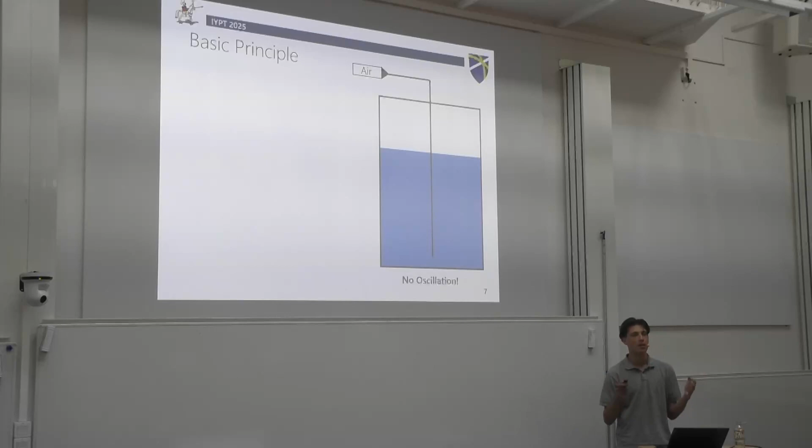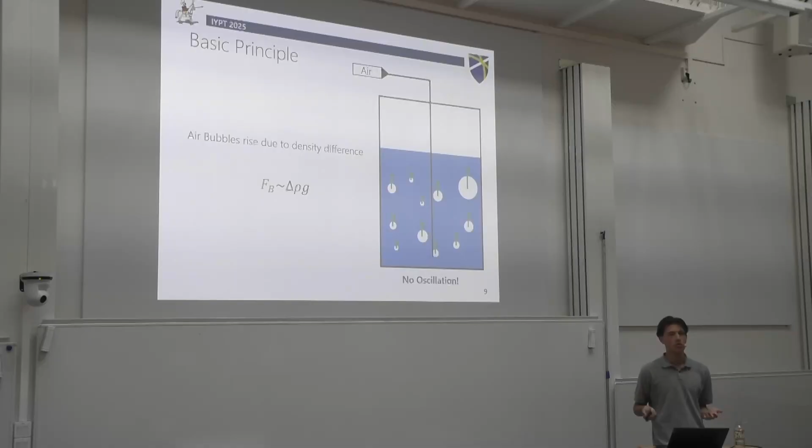So first of all, for the basic principle, the very counterintuitive thought: how could an air layer form in the first place? So we're going to take a look. If we have no oscillation and inject some air into the container, of course, all of the bubbles will rise due to the buoyancy force generated upwardly. So no air layer will form. But what happens if we now actually have an oscillation downwardly? Then we modulate the effective gravity. That means that we not only have the gravity but also the acceleration due to the shaker.

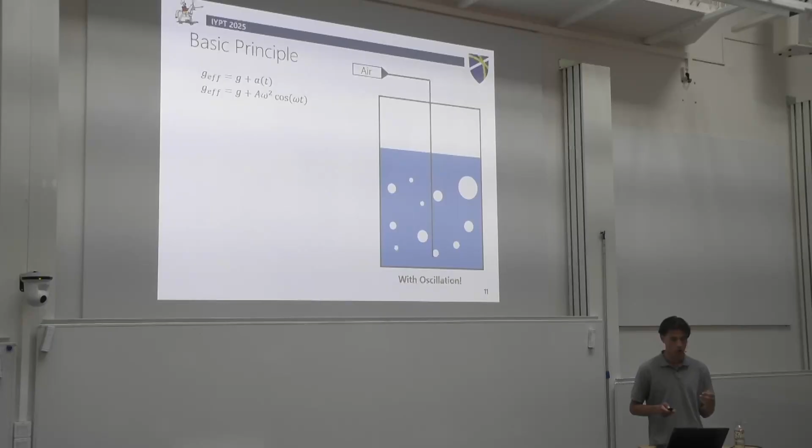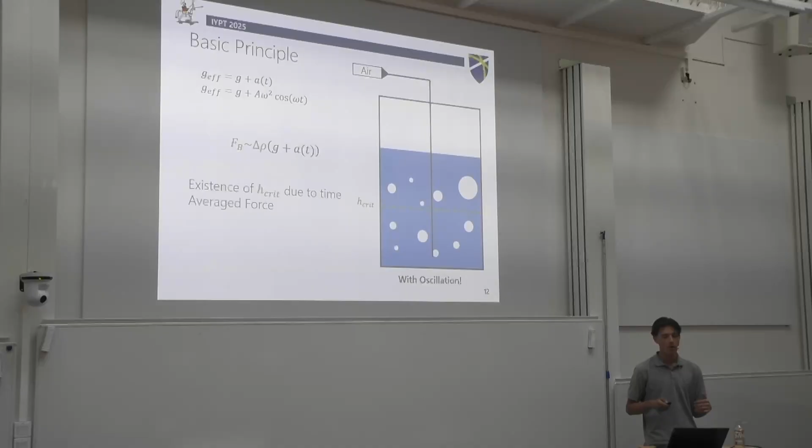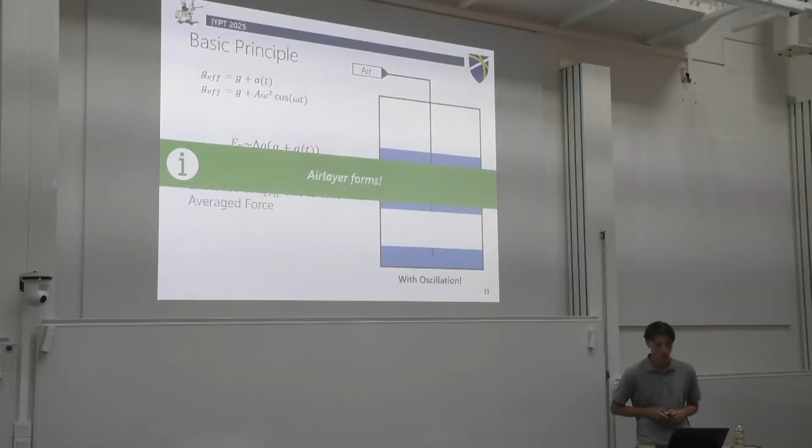So, and now due to that the buoyancy force is now proportional to that acceleration, we can time average that force and find out that there's actually a critical height below which all of these bubbles will sink, and beyond that critical height all of the bubbles will rise. Therefore, if we inject enough air volume and the oscillation is strong enough, some of the bubbles will rise and some of the bubbles will go down, and therefore an air layer is in the first place able to form.

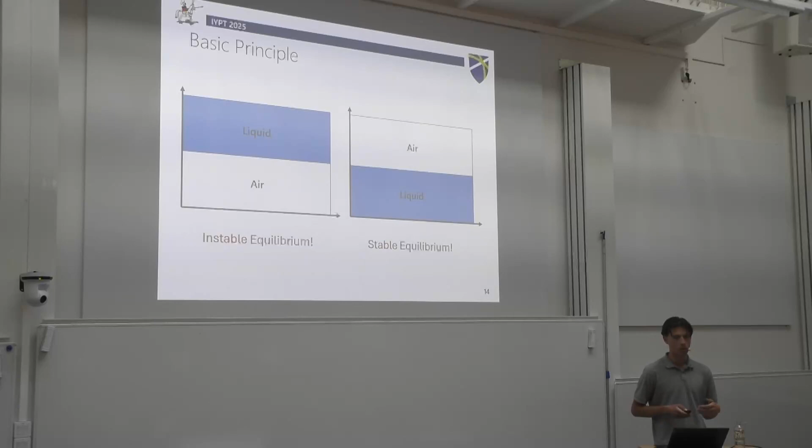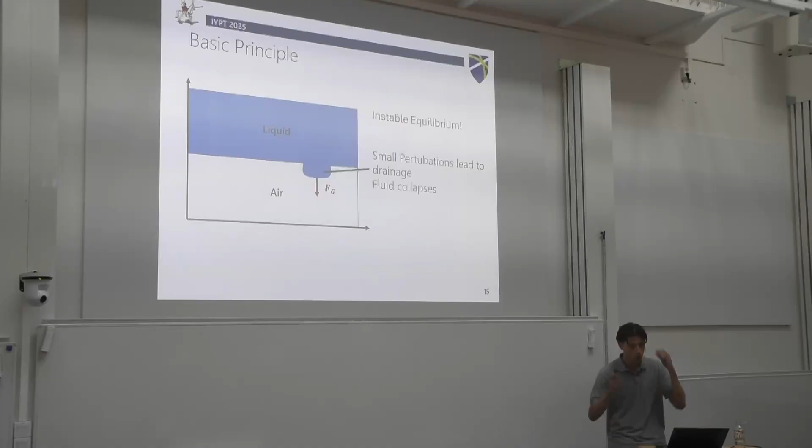So now that we know that, let's have a further look at these liquid-air and air-liquid compositions. Note that the composition we have here, liquid-air, is an unstable equilibrium. On the other hand, the air-liquid composition is a stable equilibrium. That means that if we look at the liquid-air interface, any small perturbation onto that surface would cause drainage and a full fluid collapse. So how is the liquid then able to oscillate in the first place?

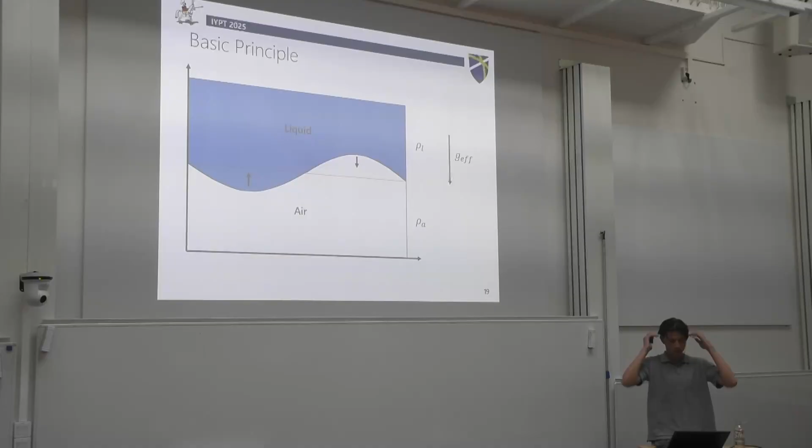Therefore, we're going to take a look at the so-called Rayleigh-Taylor instability, because we have a pressure difference on both of these sides, and now effectively modulating the surface. If the effective gravity is going upwards, the modes on the surface of the liquid are going to increase, and if the effective gravity goes down, these modes are going to decrease. Therefore, because the negative part of the effective gravity is higher, this liquid can be stabilized.

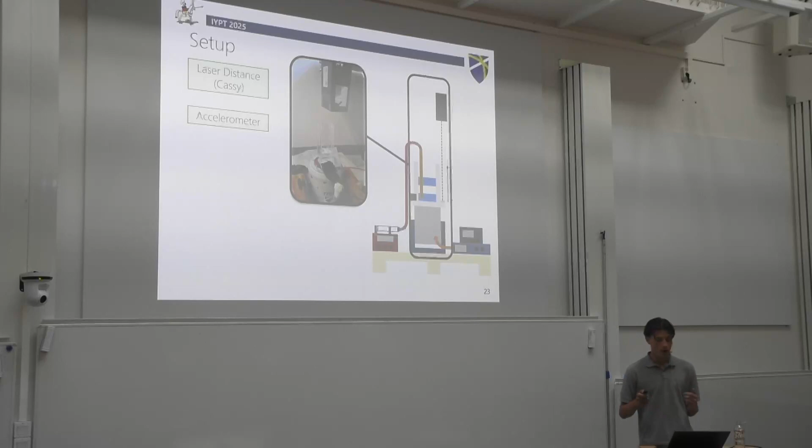So for an overall overview, we're going to start with the experimental setup, continuing with the first part, the stability analysis, and thirdly, looking at the stable oscillations, and concluding in the end. So for the setup, we used a laser distance meter as well as an accelerometer in order to measure the amplitude as well as frequency of our shaker system. The shaker was controlled by a function generator and an amplifier over a voltage output.

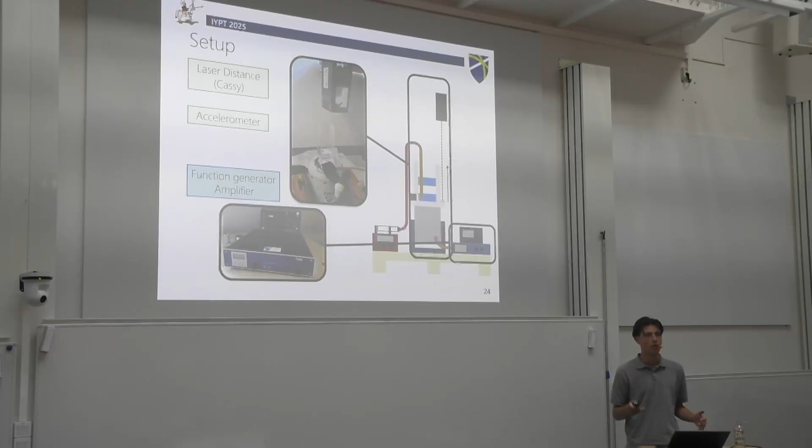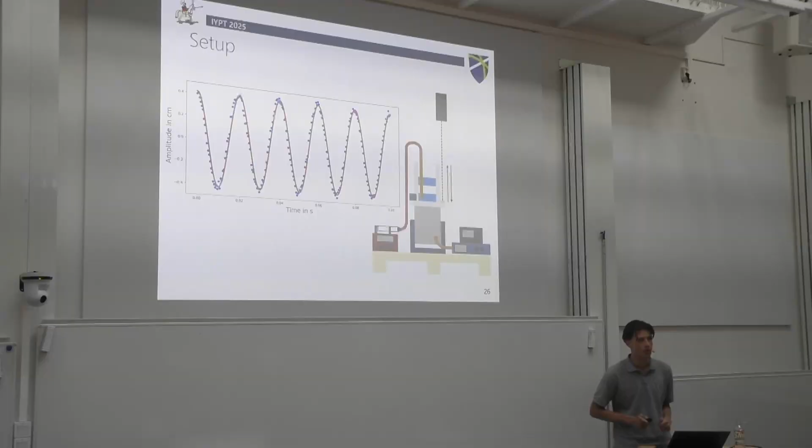In order to control and precisely inject air into our container, we used a syringe pump, which you can see right here. And we also double-checked that our setup actually produces sinusoidal oscillations, which are in the first order given here. So our setup produces that indeed. For the different materials we use, we have different silicone oils with different viscosities, and we have different container sizes and shapes.

For our data analysis, we're using Python in order to find our critical amplitude based on the data from our accelerometer. And for the stable oscillations, we're using Tracker in order to track the fluid surface. So let's have a look at the stability analysis, and therefore we're going to plot some preliminary analysis. We're going to plot the amplitude over the frequency and see where the liquid falls down, and if there may be several boundaries. So if we look at it here, we can see that we have one lower boundary and one upper boundary.

But what does it look like? Therefore, we brought a video of an increasing amplitude. You can see here that the surface gets very unstable, and at some point the whole fluid will collapse downwards. And then if we decrease the amplitude, at some point the oscillations can't stabilize the surface anymore, and all of the fluid will drain, as I've already explained, like in an unstable equilibrium.

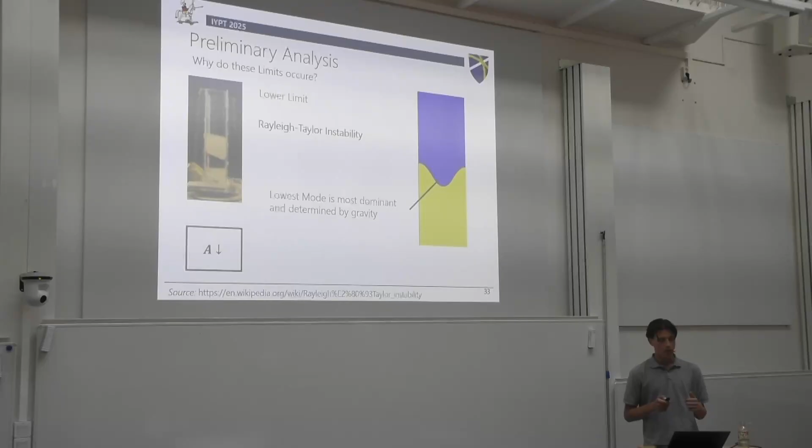What is this due to? The lower limit is due to the Rayleigh-Taylor instability, where the lowest mode is the most dominant one and it is affected by gravity. And therefore you can see this fluid collapsing. And for the upper limit, we have the Faraday wave instability, where the inertia of these Faraday waves overcomes the capillary effects of the waves themselves. So we took a video from the top and could see that we have some kind of Faraday wave pattern inside of our container. So therefore we now want to further investigate these wave patterns.

Therefore we're going to take a look at the standardized Faraday instability. Assuming that we have a vorticity-free flow, we can represent the surface as a superposition of harmonic eigenmodes, where we have on the one hand the spatial structure determined by the harmonic eigenmodes and one time-dependent evolution term determining the amplitude. So first of all, we take a look at the harmonic eigenmodes, which need to satisfy the Helmholtz equation, and by constraining a Neumann and the no-slip condition, as well as a free surface, we can solve for the following eigenmodes, which are a product of cosine and sine functions, where you can see a representative mode for the 5-3 mode combination. So now that we've clarified the spatial structure, let's move on to the time dependency.

Therefore, we're going to start with the standardized Navier-Stokes equation, and assuming that we have kinematic boundary conditions as well as the dynamic boundary condition of the pressure being tangential to a free surface, we can then assume that we have a rotation-free, stationary, and incompressible flow, and solving for the potential of our fluid, which is interestingly growing with some kind of tangent hyperbolicus.

And then solving out of this, we can separate the variables and solve for the actual differential equation describing the time dependency, which you can see right here, as well as the dispersion relation connecting the eigenfrequency of the surface with the wave number. So let's have a look at this. We can see here that we plot the dispersion relation of the wave number. For smaller wave numbers, gravity determines this term, and for higher wave numbers, the surface tension determines the surface dynamics.

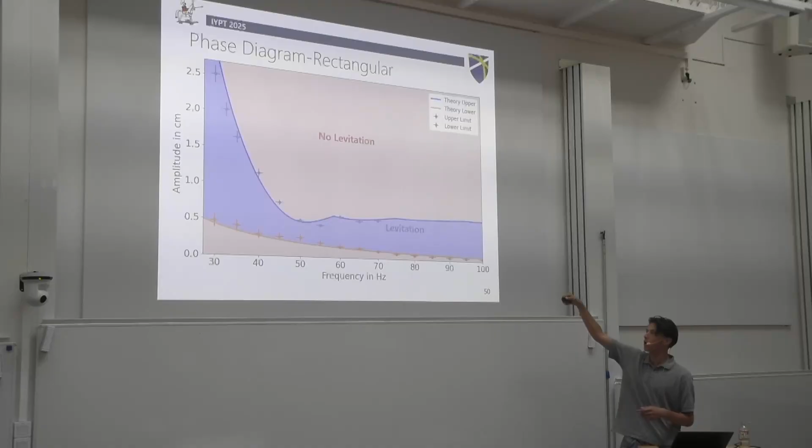So therefore we found in literature this equation for this instability criterion, and plugging all of this in, we get the following equation for the critical amplitude, and plotting the fundamental mode as well as the respective mode for every single resonance tongue. We can then look at our experimental results and see that we have a very good quantitative agreement with our theory, where we can see a clearly distinctive resonance tongue, typical for the Faraday instability, on our upper limit. And so that means that below and over those curves, there's no levitation possible, where in between the levitation is indeed possible.

So the same we did for a circular container, where we need to apply different boundary conditions. As you can see here, we are also able to quantitatively predict the upper boundary as well as qualitatively the lower boundary. We also investigated the lower limit for the different viscosities, where we plot for different frequencies, and can see here that for most of our experimental results we are also in quantitative agreement, because higher viscosity increases the stability of the surface, therefore higher inertia effects are required in order to break off that surface.

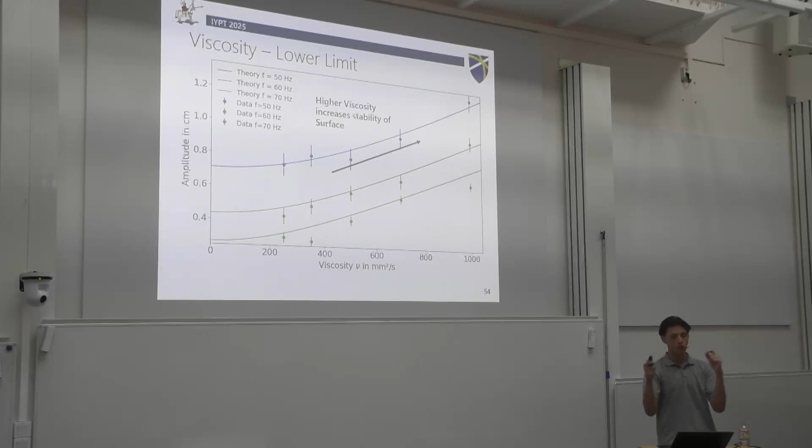So now we fully investigated when the fluid layer is able to oscillate. Let's have a look at how it actually oscillates. Therefore we're going to take several little steps. So one can look at the container and the pressure and volume, assuming the ideal gas law only for this air cushion. We can then write out the complete pressure force, accounting for the atmospheric pressure as well as the gravitational force.

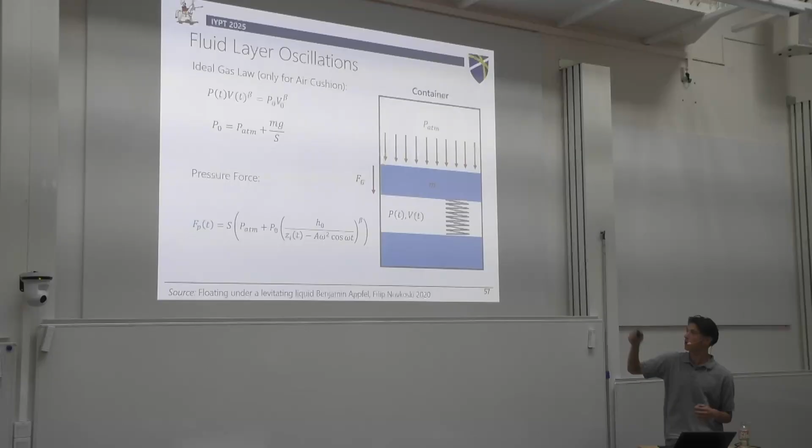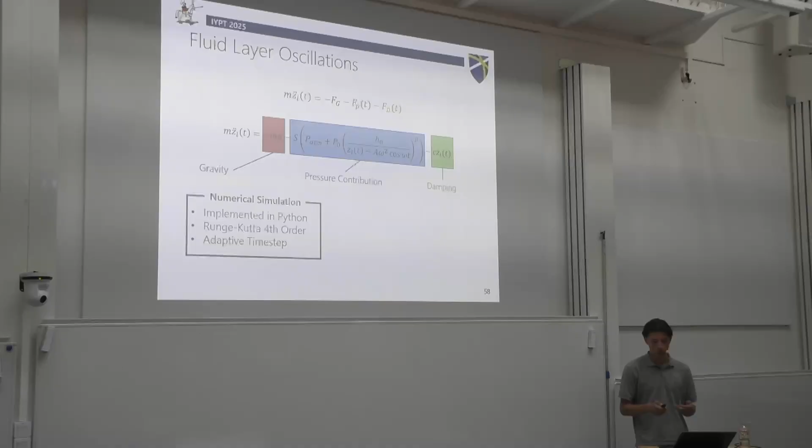And then we get the following equation for the pressure force, which reminds us that this air layer actually acts as some kind of non-linear spring. That means we get the following differential equation, accounting for gravitational pressure as well as damping effects. So, because there's a non-linear spring, and we also have an external vibration to the system, we could possibly think about a resonance oscillator. So we can very shortly plot the resonance behavior of such a phenomenon, only theoretically, where you can see that this behaves in an approximately Lorentzian way with one resonance frequency.

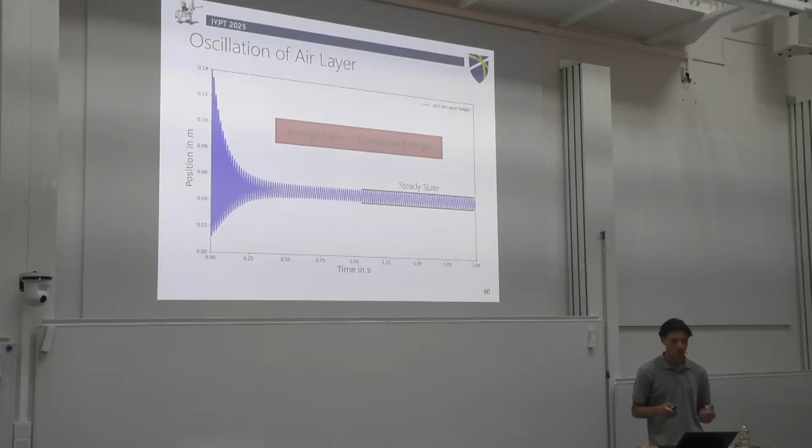But nevertheless, we want to investigate the actual motion of the air layer height. Therefore, we are plotting a simulated curve where you can see in the beginning a stabilization due to the nonlinear pressure effect, and in the end, a steady state oscillation. The steady state is reached when the energy input from the shaker approximately matches the dissipated energy. So we can zoom in onto the steady state oscillations and plot our experimental data we've achieved from video tracking, and can see that we're actually able to precisely predict this by fitting the damping coefficient.

Note that here, interestingly, at some point, the oscillation of the air layer itself comes up with the exact same frequency as the shaker, only with some small inaccuracy due to the nonlinearities in our differential equation. So let's have a look also at these non-steady state oscillations in the beginning, where the whole fluid itself gets stabilized on its own.

We can see here many things could remind us of a kind of Kapitsa effect, plotting FFT of that. We can also indeed see that we have one very fast vibration with a lower amplitude, and then going on to zero with a high amplitude and very low vibration, having the same effect of a Kapitsa pendulum where the unstable equilibrium is stabilized as well.

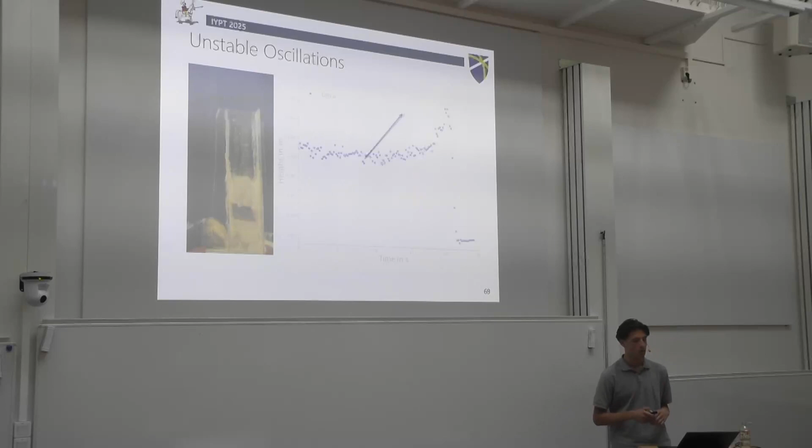And now think about what is happening here, because at some point the fluid gets unstable in some kind of way. That means the mass of the fluid layer gets reduced, and a little bit of the fluid is falling down. So therefore, due to conservation of momentum, we just generate an upwards force driving the fluid to an increasing height. And when the complete mass has fallen down, then of course the whole fluid collapses itself.

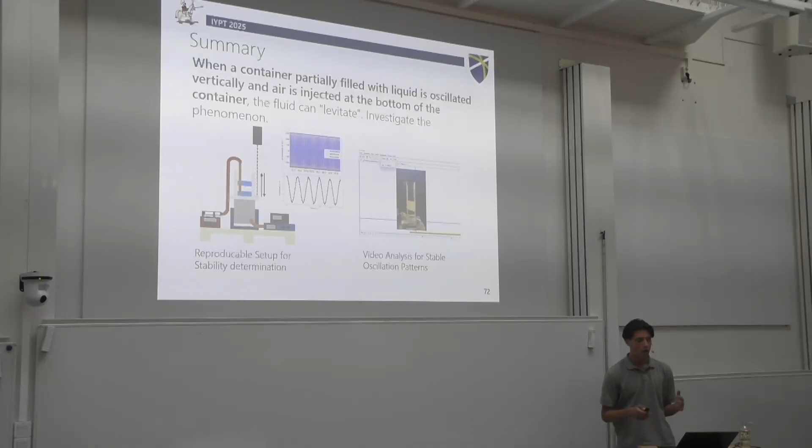So let's briefly summarize what we did today. We've built a reproducible setup for the stability determination and used Tracker for the video analysis of the stable oscillation patterns. On our theoretical side, we used harmonic eigenmodes and the Mathieu equation in order to model the surface dynamics, and we used a nonlinear pressure model for the stable oscillations of our liquid. So we are able to predict the stable levitation for different frequencies, viscosities, as well as an investigation of stable and unstable oscillation patterns.

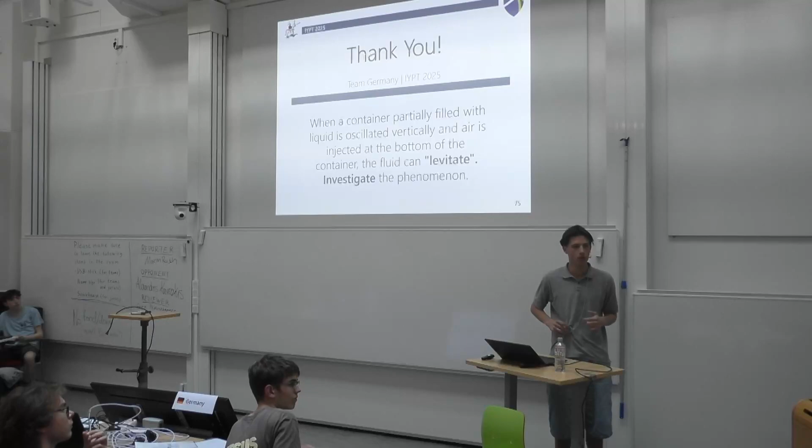So first of all, I want to ask you whether you encountered any bubbles during the experiment. We do not account directly for bubbles. We believe the... Okay, yes or no? Did you encounter any bubbles? No, we do not account for bubbles. Okay. Also, I think you mentioned that you use a syringe. So how did you actually inject the air? So we use a syringe pump and then place the needle of our syringe by hand in the container. Okay, thank you.

Also, in slide 47, I think you mentioned something about the ODE part. Did you do both? Did you do an analytical integration? Why did you choose only one? What you see here, where the Mathieu ODE gets unstable, is an analytical approximation for the first order resonance tongue. Oh, and the rest was numerical? No, so this model is made analytically, and the oscillation patterns are numerical.

Okay, thank you. Also, because I didn't quite understand, you encountered multiple waves in between the layers, right? Mm-hmm. Okay. Also, in your experimentation, did you vary both the amplitude and the frequency? No, so we fix the frequency and then pull down the amplitude and see at which point the fluid collapses. Okay. Not simultaneously. Generally, if you varied both parameters. So we varied the amplitude.

Okay. Also, can you tell me exactly what is the reason for the upper and the lower boundary that you mentioned? So the upper boundary is due to the Faraday waves' inertia overcoming the capillary effect, because the Faraday waves themselves are stabilizing the liquid, but when the inertia gets higher than the surface tension, the whole liquid column will fall down. And the lower boundary is due to the Rayleigh-Taylor instability, that at some point the most dominant wave mode, which is determined by gravity, doesn't get stabilized anymore and falls down. Okay, thank you very much.

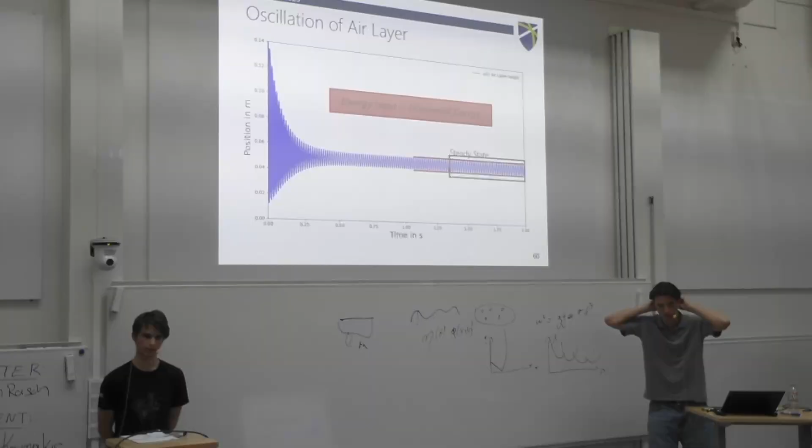The dimensions of our container were mostly 5 centimeters quadratic. Say that again, sorry? 5 centimeters, as a square? Yes, as a square. So you mentioned sidewall friction. Did you account for friction in the model? Yes, so we have a dissipation term.

And for this liquid layer oscillation, we're just assuming a velocity proportional damping. How did you determine this? So we fitted that to our experimental data. Okay, thank you. Did you investigate the resonant frequencies of the fluid? And if we oscillate at that resonant frequency, does that relate to the amplitude of oscillation of the fluid?

No, we have only theoretically investigated the resonance behavior, but that would be definitely possible. Opponent, do you think that the resonant frequency of the fluid is significant, and that if we oscillate at this resonant frequency, it will increase the amplitude? I think I agree with that. Yeah, but I think it should have been investigated by the reporter himself.

How did you define the position of the fluid? Was it the center of the fluid? When you did your experiments, did you measure it from the center? Yes. And in your model, was this accounted for, that it was from the center of the fluid? Yes, so we modeled it in a standardized Faraday waves model.

Opponent, how significant do you think the bubbles are to the motion of the fluid? Like when it's climbing upwards, you mean? Yeah, in terms of the overall oscillations of it, how significant? Oh, it's the overall, but it actually would change basically the width of the layer itself, and then it would create some discrepancies. I think it's a possible error, because it's a thing that we can avoid actually, when the bubbles are climbing when you inject it downwards.

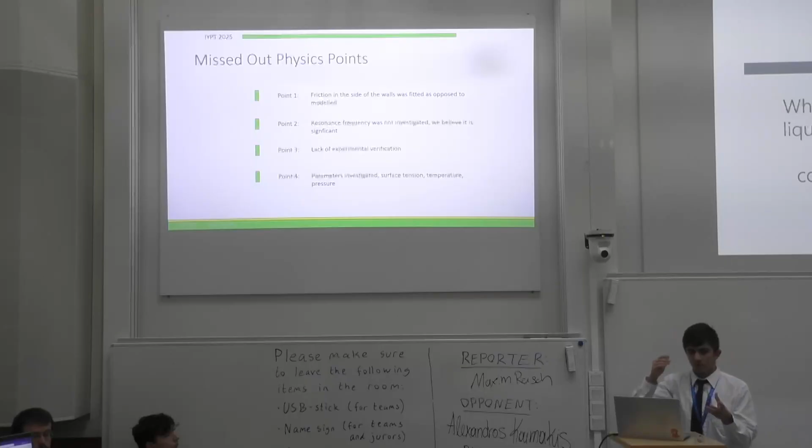There was discussion on the clarification of the climbing of the fluid, and we believe that the reporter's explanation of how the fluid climbed up was well done, but we do think that there's a missed point here with the resonant frequency, because we believe that oscillating the fluid at that frequency will be part of what increases its amplitude. And also, friction in the sidewalls was fitted as opposed to modeled.

And thank you. Okay, I'm sorry, I forgot my microphone.

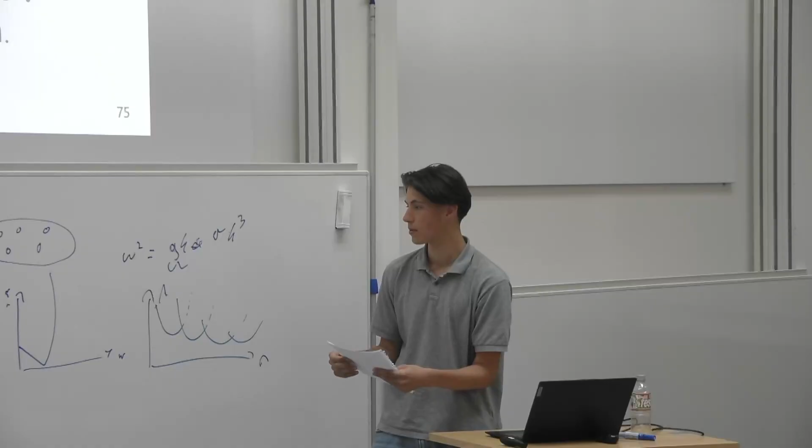For the concluding remark, the opponent pointed out some interesting points such as the bubbles. I still believe that these do not add to the actual phenomenon, because the mass and volume change they have, I believe, are minimal and insignificant, but still a possible future investigation. We talked about the Rayleigh-Taylor instability and whether the lowest mode is in the middle or actually on the side, and we're trying to get a basic explanation. In general, the opponent covered a lot about the basic explanation parts, such as the upper and lower boundaries.

So I want to clarify first of all that we did not pump in the air by hand. We only placed the end of the syringe in by hand and pumped in the air with a syringe pump. So that was controlled. Only the input was made by hand, which I believe is not significant, because as long as you have it in deep enough, pulled completely downwards, it's okay.

Additionally, we talked with the opponent about the stability of the upper boundary, that only the minimal transverse modes are stable. And I want to add on the reviewer's suggestion on the resonance frequency. I want to first of all clarify that we have two different resonance phenomena happening here.

One, we have a resonance from the air layer, and we have a parametric resonance of the surface, where the parametric resonance is due to the eigenfrequency of the surface itself. And the resonance curve I showed is for the resonance behavior of the air layer. So therefore, I also believe that this resonance phenomenon does not come into the account of the edge case investigations, because you see that the complete mean average height increases and not only the oscillationary mode, which would be typical

for normal resonance behavior. And with that, thank you so much to the opponent and reviewer, and thank you that you made that happen. It was my reason that we rescheduled this fight. Thank you so much.

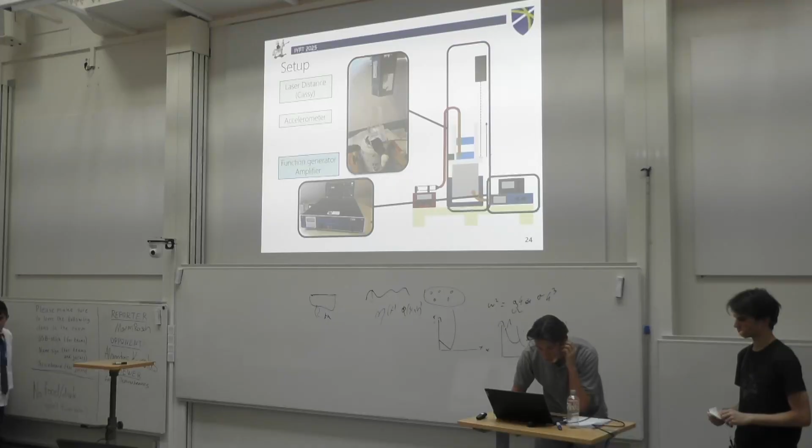I have a question to the opponent. I would like to know your opinion on whether the speed of pumping the air into that space is important for the behavior of the system. The speed of pumping, basically? Yes. First of all, if you have higher speed of pumping, you wouldn't have such uniformity on the layers. But then again, I think the speed of pumping isn't as significant as the other parameters. The only thing that could create problems if you increase the speed of pumping very much is the problem with the bubbles. So I think it isn't such an important parameter to take into account. Okay, thank you.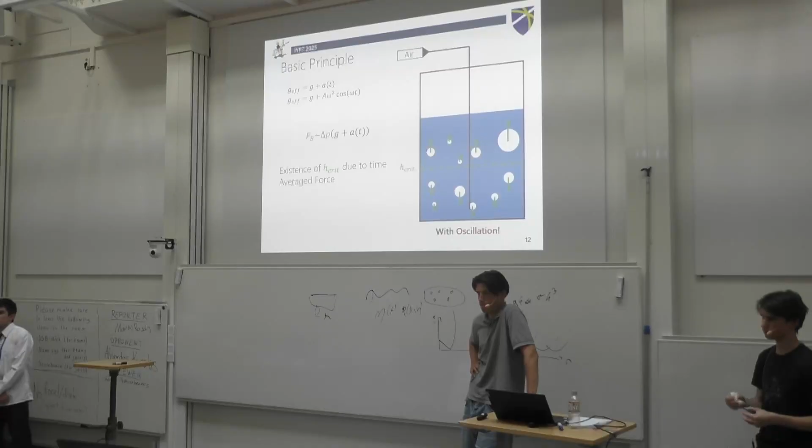Last question to the reviewer. How has the density of the liquid in that experiment influenced the behavior? Density would mean, I believe, a greater amplitude of oscillation would be required, a greater frequency of oscillation would be required to reach the same amplitude. Thank you so much. Okay, then juror members will sum up their scores.